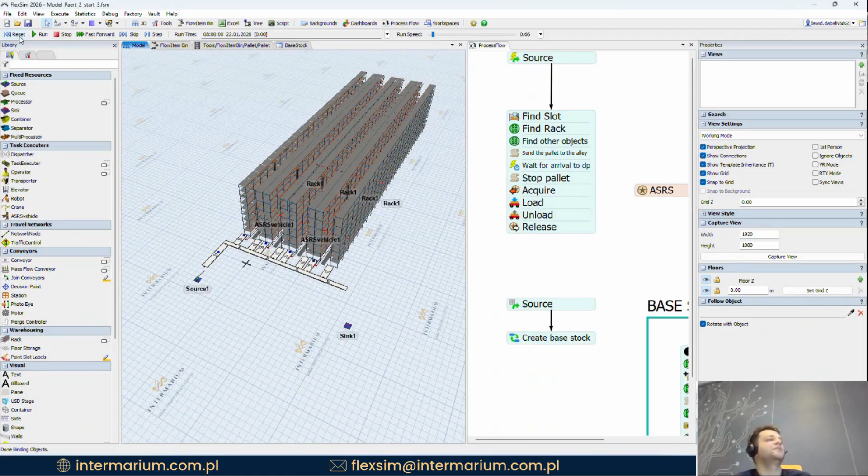In this webinar, we are working on an automatic warehouse. This is the second part, maybe three or four parts total, and we should be able to finish this warehouse. We're doing this thanks to your suggestions, more like a workshop. A lot of users requested this automatic warehouse, and this is also how we work with our clients. So if you have any case you want to do, maybe you want help with modeling on your cases, we can set up a call or make a workshop where we try to help you build something together with you, as I am building this right now with you.

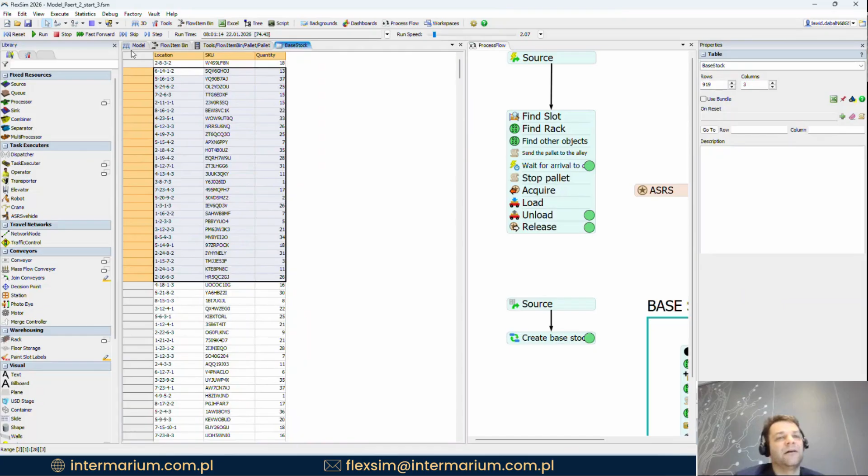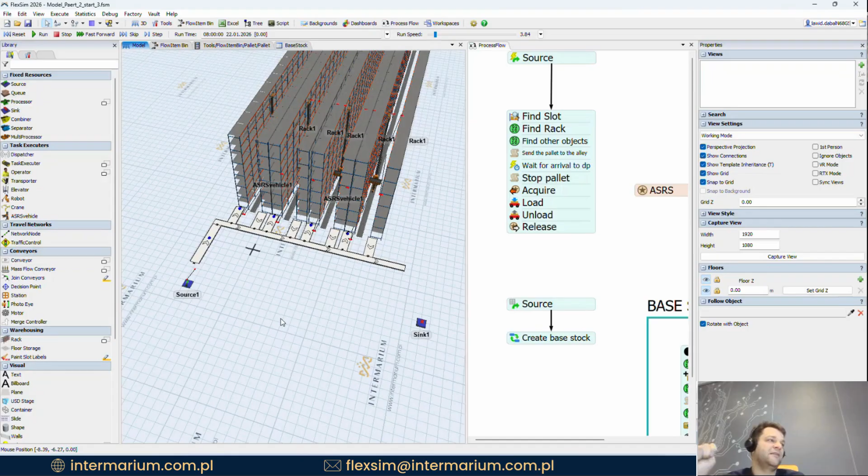Okay, so let's start. As I mentioned earlier, this is where we finished previously. We had the working ASRS, working rack structure, working conveyor base, and we have a base stock table, so we can generate the base stock in our warehouse according to this table. This is what we have. What we want to do today is bring in more data. We want to have inbound and outbound data in this, because right now we just have the source, and the source just generates the pallets. We want to have some table with inbound timestamp - let's say we want to try out some historical scenario or generated scenario with a given timestamp and a given product. We want to have it all. And also we want to create the outbound movement, because right now we are just putting the pallets into the racks, doing the put away logic. But we also want the logic that whenever I do the put away, maybe the ASRS, there is a need for some pallet, and the ASRS can pick it up and move it onto our conveyor system. So this is what we're going to do today.

So more data, more input. In the Excel file, I have the base stock - this is something we are already importing into our model. And I also want to have the inbound table. So what I have here is some pallet. On the pallet, there are some number of goods, 5 in this case. We're going to represent this as a label, and we have a timestamp, so I want this pallet, let's say, to appear in my system at this time. So this is the time I'm going to use here.

So at the 20-second and 26-second mark, I want my pallet to enter my system. I have this for inbound and I have this for outbound. I also want to take from my warehouse this SKU at this timestamp. So this is where the request is going to appear. At 107, I want to request this pallet from my warehouse. I don't know where it is - it's somewhere based on the base stock table. I want to request it.

So I have this in Excel. We already created some Excel import interfaces before. So what we need to do now is create global tables from our data.

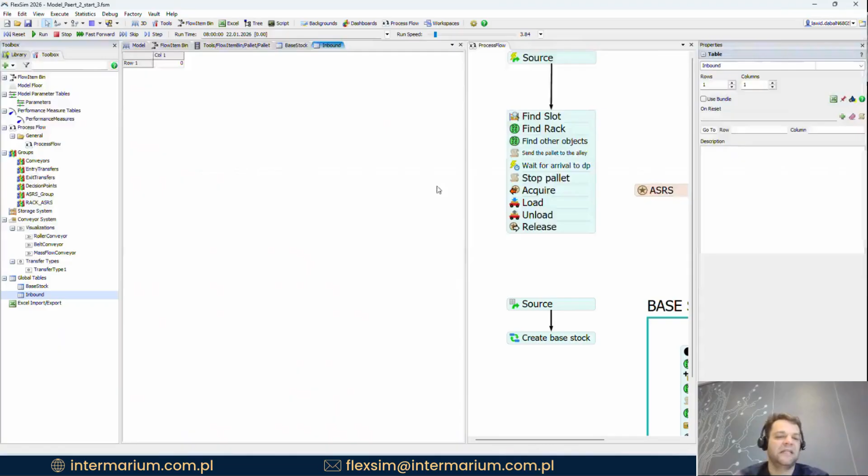So I will call it inbound. Let's start with inbound - so this is my table. I need to check how my Excel sheet is called. It's called inbound. I'm going to copy it, then go back to my model, the Excel interface.

I will add one more import line. I'm going to call it inbound, from the same workbook. Here you can choose new, and then the user can choose the next sheet - maybe it's a different Excel file, or blank. If I choose blank, then it's the same Excel file as I chose before. So if I know I have all that data in one Excel file, I can choose blank, and then we just import different sheets from it one by one.

So it's the inbound sheet, and I want to put this in the inbound table. I don't have headers, I have the columns, so everything's okay. I can now click import to this Excel, and now I have that data from the Excel file. So this is my inbound table. I have now base stock and inbound, and those are the same data I have in Excel.

Okay, so now we have data, so now we can start working with it. We have data - let's go back to the model.

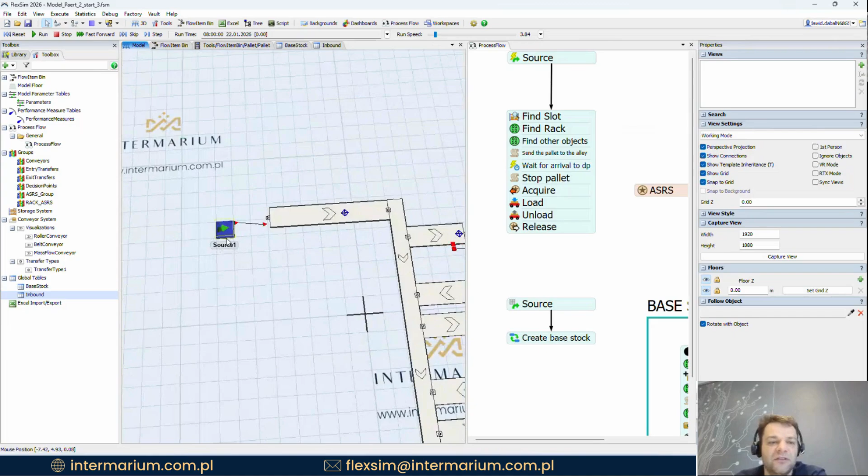So before I had the source, and source just generates pallets for me, but it's no longer the case, because I want to generate those inbound pallets from this table. So I need to write the logic to create it.

What I usually do is use a queue, and I'm generating everything on this queue, and then automatically it's getting added to the entry channel for the conveyor. It's a bit easier for me because then I can track the backlog. Maybe if I have some blockage, I can track how many products are on the queue, meaning there is no space for them in my system. So it's a little bit easier if I do it like this.

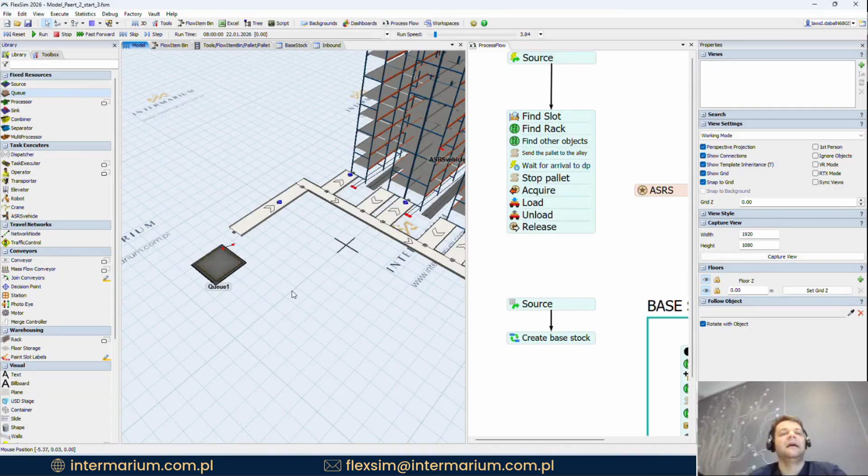And of course it's better if I want to handle the overflow in a way. So I have the Queue1, let's call it inbound flow - this is where I will start my inbound flow. I want to generate a pallet on this queue, and then using the port connection, it's going to be automatically moved on my conveyor system. So this is the object.

Now let's create the logic in the process flow. So what I want to do - I have this inbound table. Maybe I will just dock it for a moment here so I can see it. And I want the pallet to generate here with this SKU, with this quantity, and at this timestamp. Okay, so how can we do it?

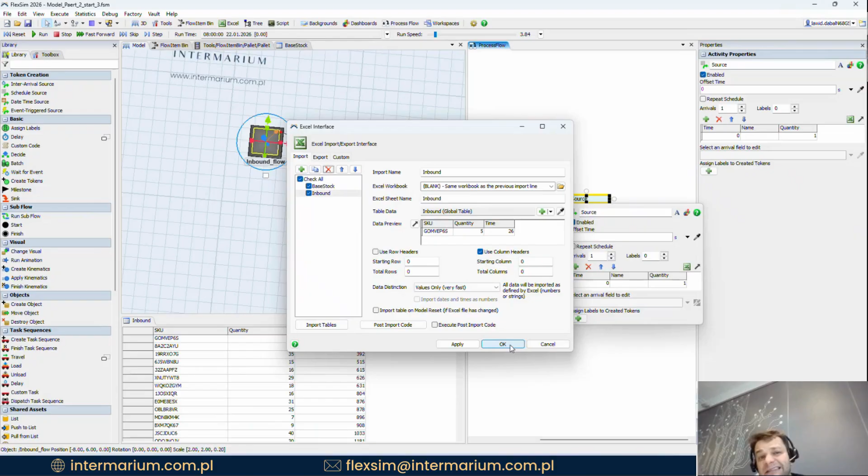There are multiple ways of doing it, to be honest. One way, for example, is you can use the source, and you can get this part of the Excel file to be stored using the Excel interface. So if you structure your table in Excel correctly, it can be transferred right here in the schedule source. It looks easy, but I'd say it's not very good in terms of performance - this can get really slow.

So what I usually do - there are also multiple ways of doing it - we can generate as many tokens as I have rows in my table, and then make a delay. And when the delay finishes, I will create the pallet. But then the issue also with performance is that, okay, in this case I have 1,000 rows.

But if I have, let's say, one month's worth of inbound, and each time I'm generating the inbound I need to create as many tokens as I have rows, and I have 10,000 rows or 100,000 rows, then the model will be very slow at the beginning because you need to reserve a lot of memory for all those tokens, because it's 100,000 tokens. So I think what I usually do is just generate one token - this is my one token.

I'm going to go through this table step by step, creating a delay that is the difference of these 2 values. So for example, the first is 26, it's easy, but then the next one is going to be 32 seconds. And because I have 1 token, I will just move in a circle, move in the loop.

I don't need to create as many tokens. Performance-wise overall it's the same because I will generate 100,000 tokens, but because this performance is distributed along time, the model will go smoother in the beginning. Usually, especially when you're building a model, you're going to reset and run it a lot, and you don't want to generate thousands of tokens each time because it makes the model slow. You need to wait a few seconds, and if you wait a few seconds every reset run, it will get on your nerves every time.

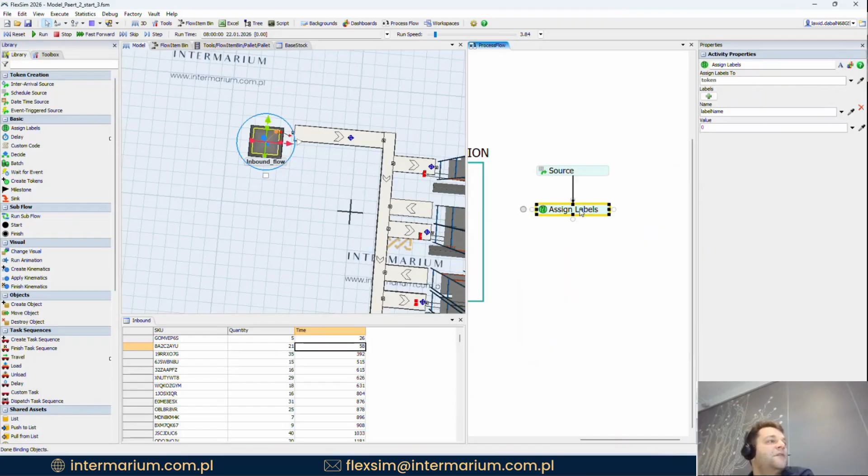So let's do it like this. I will generate 1 token, and in this 1 token, what I need to do is create what I want to create. Let's do it now. I will have the assign labels here, and in the source I will create 1 label. Let's call it inbound row, starting with 1. So this is my first row.

Maybe start like this: I have a delay. On the first row, I need to have a delay because I need to wait this time, because the first row is different since I don't know the difference between those 2 values. So what I want to use here is this value from the first row: token dot inbound row inside. Now when I reset run, we have 26 seconds as I have in the table.

And then after this time, I want to create the pallet. So I will create an object, let's call it create pallet. Now this is going to be our palette, so I'll go to flow items and choose pallet, which we already created before in the flow item bin. There's going to be 1 palette. Let's call it palette. It should have 2 labels, SKU and quantity.

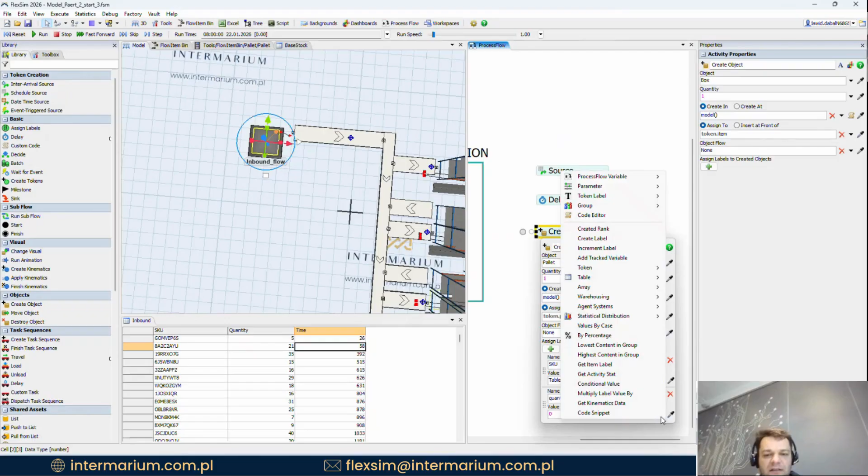So it will have the SKU. I will sample this and change it to token dot inbound row. You can also do it if I have the quantity here, by choosing this option, go table, global table lookup, and then fill this out manually, like this is the second column. It works the same, but the main difference is that with this, if I have more labels, I can't copy it, because it just copies the header, not the logic itself.

That's why I prefer choosing it like this and just changing the row value, because then if I have more, I can just copy it and change the column, and it's much faster, especially when you have a lot of parameters that need to be moved from the table to the model. It works virtually the same—I have these 2 parameters. So at this time, 26 seconds, I want to create the palette, and the palette has all this parameter, and I want to create it in an inbound flow.

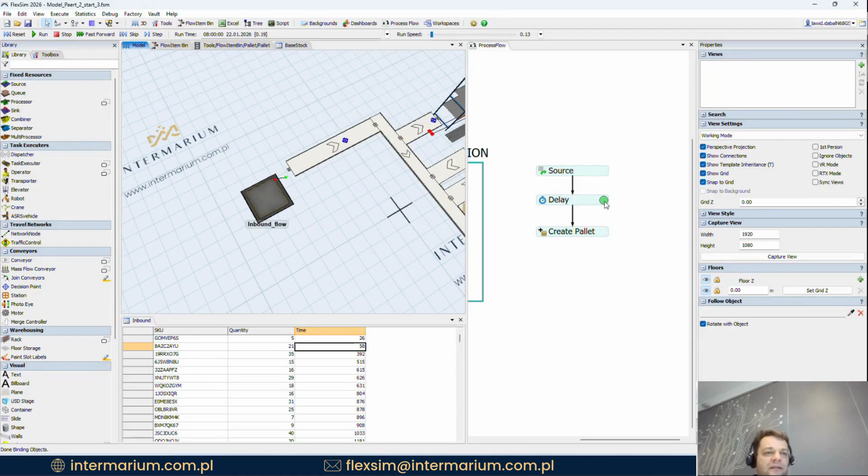Okay, so if I have it, this is, let's say, the first loop. Now I need to loop it. So what I need to do here is create the assign labels, because I need to increment the inbound row. I need to increment it, because it was the first row, then second, third, fourth, and so on. So I want to increment the inbound row, increment label by 1. If I increment, then I need to create a delay.

So it's going to be a delay, let's say, between pallets.

In this case, this delay is the difference between 58 and 26. So I can copy it, and it's minus the previous row, so -1. Isn't it a trick? It's this row minus the previous one. So then I have the correct calculation of delay between those two arrivals.

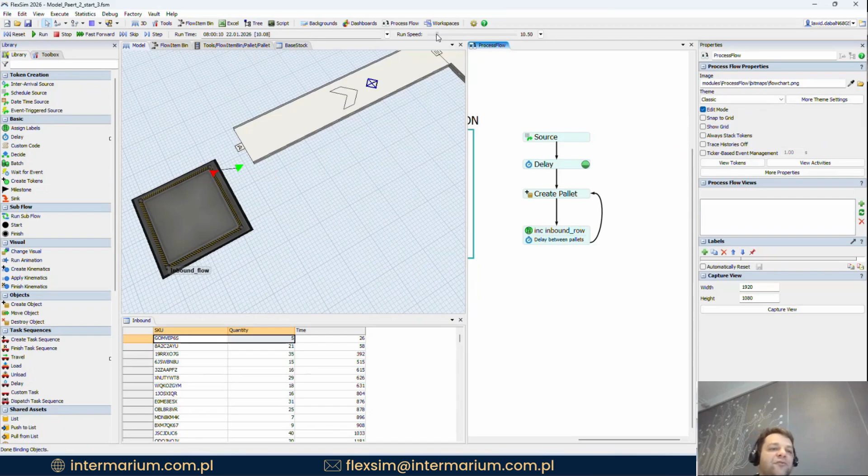So in this case, I can use historical data, for example from my WMS system, or I can create my own scenarios in Excel using timestamps, and generate the flow based on historical data. It's pretty easy, as you can see, to do it. You just need to have good data.

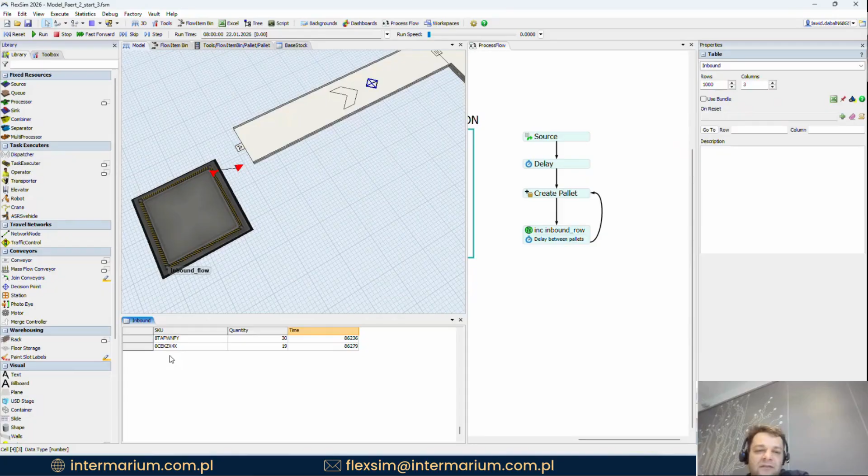What you need to remember is that at some point the simulation table will finish, because I only have 24 hours of data in this case. So if I have 1,000 rows, and I get the inbound row value as 1,001, it will return an error in FlexSim because I don't have data in that row, since I don't have that many rows.

So usually you need to be sure before you start this calculation that you check if the inbound row is still less than the number of rows in the table. You still need to check this. So we will write a conditional decide: if I have the global table, I can write there the number of rows, and check that the number of rows is still greater than or equal to the token's inbound row.

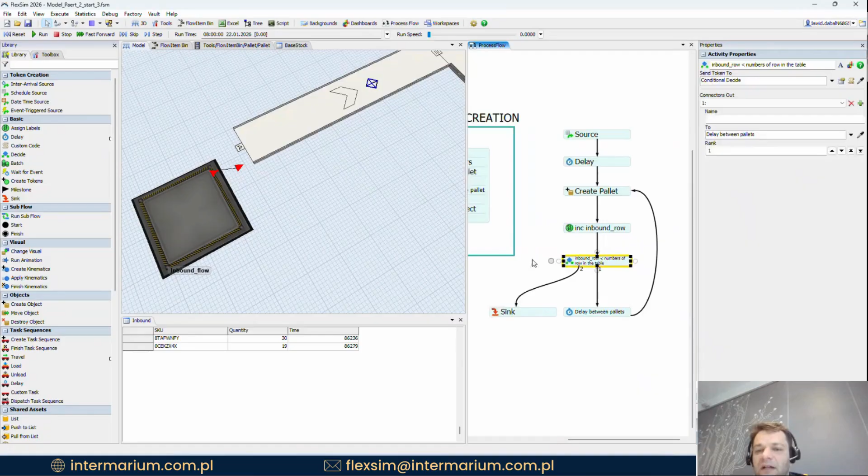If this is true—let's say my inbound row is 950 and I have 1,000 rows—still good. But if it's 1,001, I don't have that much data, so I need to break it. I want to destroy the token, stop this logic, and not generate anything more. It's good to do it like this because then you've finished the data.

So for example, you can create some stop into the model. You can stop the model. Let's say you generated everything, and I want to stop the model whenever I have the last record of data, or after some time from the last record. So you can have a dynamic stop of your model because you calculate everything, and you never know exactly when it's finished since you can have a dynamic set of data.

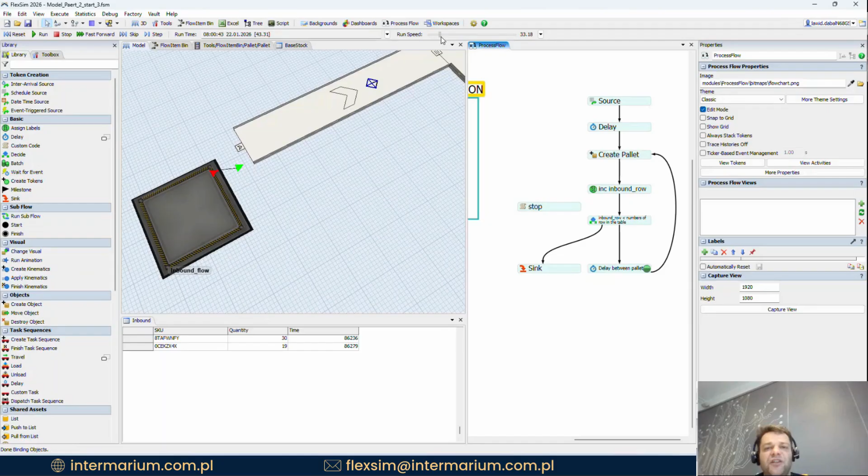So in this case, you have this flag control point. You generate everything, and then I want to stop the model and maybe run some calculation. This is something you can do here, because with this decide you've generated everything you needed in the model. And now it will loop back in the logic and generate different pallets. So this is the inbound, and inbound is good.

For future reference, if you want to stop the model at a given time, you can go to the script. And in the script, if you just write stop with brackets and a semicolon at the end, this is your stop. So if I put it there and reset and run, the model will automatically stop at this point of the logic. If I run it again, it's like pausing, then the model will continue.

So you can have some stoppage to see when something happens. It can be done via stop, or it can also be done with a breakpoint. Then the model will automatically stop at this point, and you can debug your process flow, see what is happening, maybe put a little more thought into the logic, and see if this is working correctly.

Okay, we have the inbound, it's working fine. I will put a frame over it, a container, so this is my inbound. So I generate the pallet, the pallet enters the conveyor and moves along it. Then I have this logic here so I can understand what is happening and where I'm going.

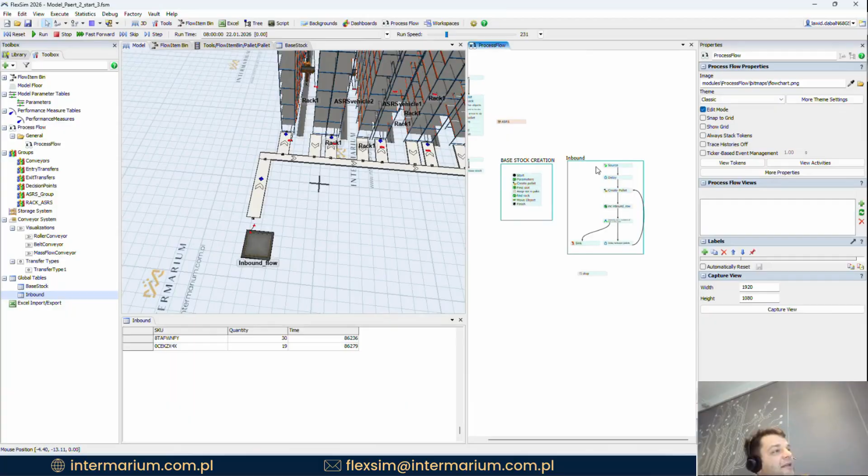Okay, this is good, we have the inbound. Now let's add the outbound. So I have the inbound, this is okay, now let's add the logic for outbound. So go back to Excel. I have a typo here, let me fix it: Outbound logic. Outbound, I have the data, SKU, when I need it, because I need to remove a pallet from my warehouse in this case.

So I will also go to the global table and create an outbound table, add this to the Excel. So again I want to create one more export file called outbound. The outbound table data is outbound, and I want to import it. It asks me which file.

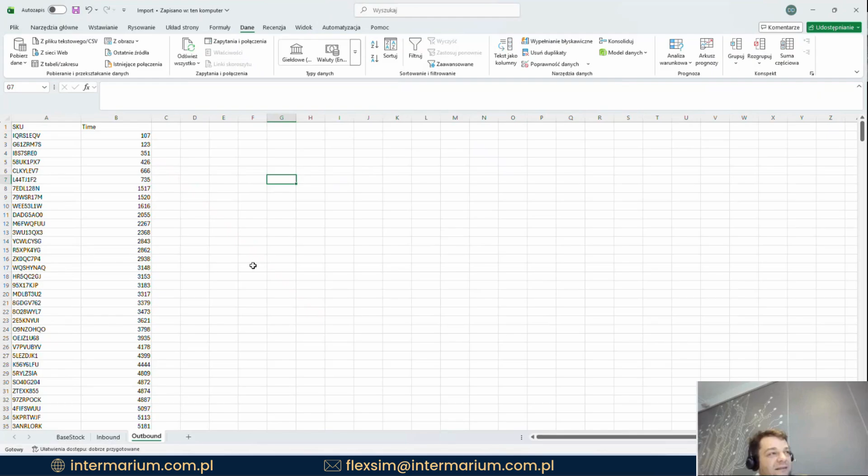So yeah, I have the error. Why? I changed the sheet name, but FlexSim doesn't show it. Why? Because I didn't save the Excel file. If you make changes in the Excel file, FlexSim doesn't see it until you save the Excel.

Yes, it's important to save it. And then if I import it, it should be all right, because I've changed that sheet name. Took me a few seconds. I have now inbound and outbound table. So we're good, we have all the data we need: inbound, outbound, base stock.

Now we can start playing around. I need to tell FlexSim that I need to get this pallet at a specific time. So we can more or less use what we already have. We have the inbound. I will copy it here.

In this case, I'm going to start making the outbound logic. So I have inbound, let's call it outbound, because the general framework will be the same. I have one token looping through this table and generating the request for a given table. So the source is the same. Maybe I will change it to outbound row. We can understand better what we are doing from the outbound row.

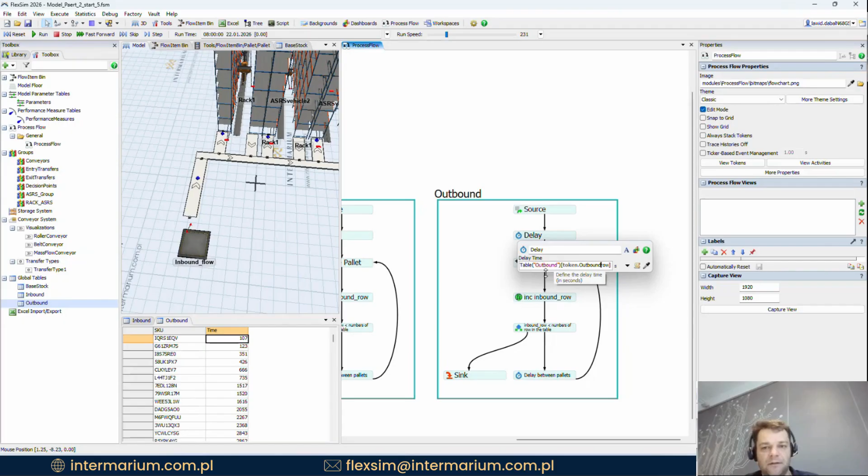In this case, I have a first delay, and this first delay is in the outbound table, from outbound row. Yeah, this is my first delay. The difference is it's in the second column because I don't have the quantity, so this table is structured a little bit differently. It's going to be on the second column.

And here is where the change is going to start. In this case, I need to look for the pallet in my warehouse. So I will create some assign labels because I need to know which SKU I'm looking for. So there is some SKU, and this SKU, let's call it SKU,

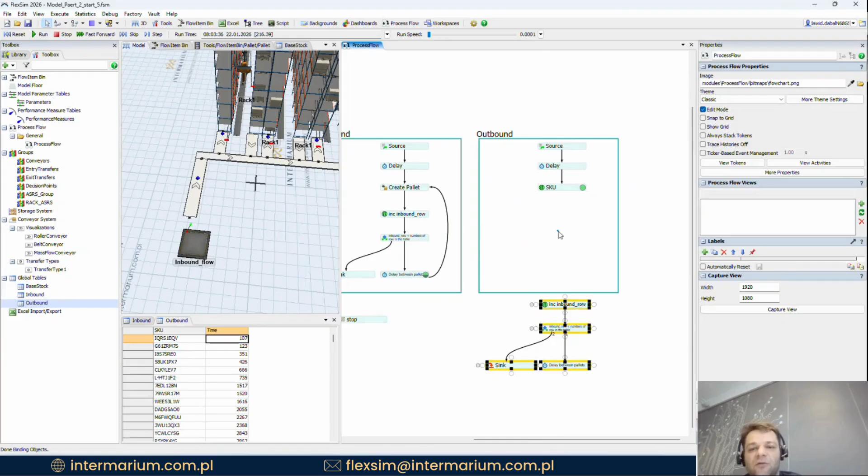is in the table. Again, I can do like this: in outbound, the row, and the row is outbound row, comma 1. So if I reset and run, I know that right now I need to get the pallet IQRS. This is the pallet I need, so it's IQRS. So what I need to do is find this pallet in my warehouse.

In this case, we're going to use the find item logic. And what is the query here?

I don't want to have any item, I want a specific SKU, and I want to match the item label. With find item, you can look for a product based on the item label, so what is on the pallet, or based on the slot label, so in a given area of the warehouse. You need to get items, you need a specific item, or anything from the given area, or any combination of both in this case.

So in this case, I'm going to match it with the item label. And the item label is SKU, and I want to compare with the SKU. You have $1, which is the parameter for this query. $1 is, in this case, token, so $1 SKU is the same as token.sku.

Because you have the parameter, you cannot mix FlexSim language and SQL. In this case, we need to pass the parameter somehow to the SQL query. And the $1, you can pass it from the token perspective. You can have more of this parameter, it depends how complicated your query is. So if I reset and run, you can see our pallet is having the SKU.

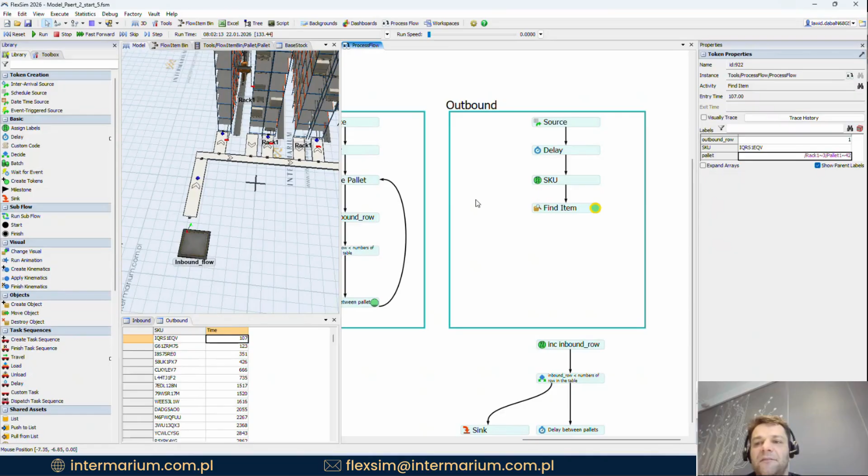So when I'm looking for a specific SKU, and here assigned to, I want this to be token.pallet. So if you find the item with the matching SKU, I want to store it in the token.pallet label. Reset and run, let's see if this works. Yeah, I have the pallet here, so it was found. If you want to see it, you can click on it, you can mark it. This is the pallet, here it is in the warehouse.

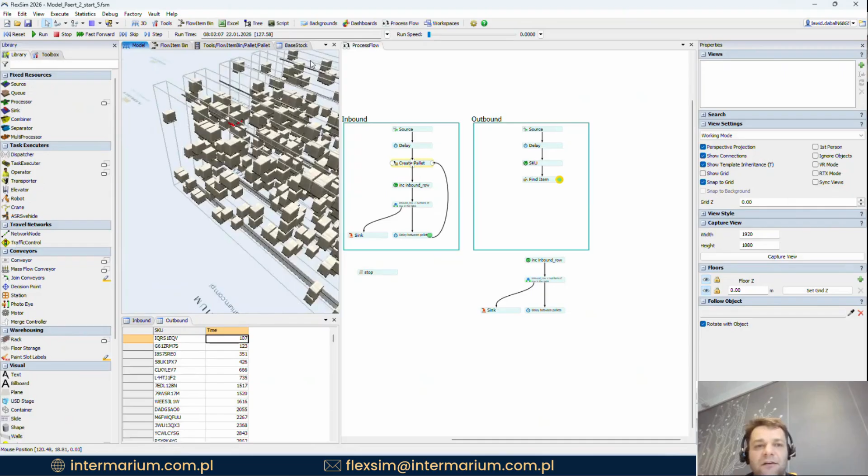Sometimes I'm building the model. Of course it's good to have the racks, but sometimes I have the group. I have group for racks, so you can click on any rack and change the visualization to wireframe, so you can see what is inside the racks. If I run it and you have this situation, you click on the binoculars to know which pallet it is. You can also click here, so it will have the red outline.

So this is the pallet I'm looking for in this case. Okay, so we have the pallet. We now know what we want. We want to have this pallet. But how can we force the ASRS to take this pallet?

In this case, we have the inbound, the outbound. Now we need to change the logic, how we are going to control the ASRS. Because right now the logic is here: you have the ASRS, and it just takes the pallet, and this is it, we acquire it. But usually you want this to be in double cycle, mixed cycle.

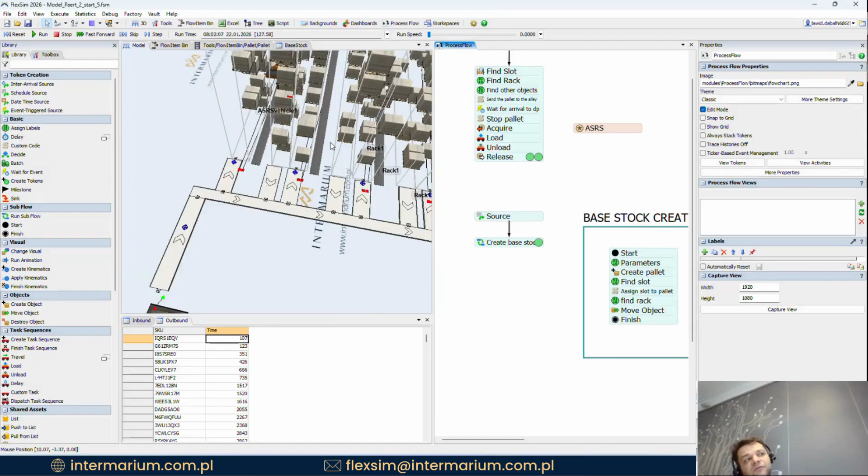So if the ASRS is taking something and putting it into the rack, I should check maybe there is something to be taken out of the rack, because there is a request here for this specific item. So we need to handle, let's say, the priority of logic, how the ASRS is working.

We're going to do here the basic framework, but basically it's pretty universal, and you can put more and more parameters there if you want to create more sophisticated logic about how your ASRS are working.

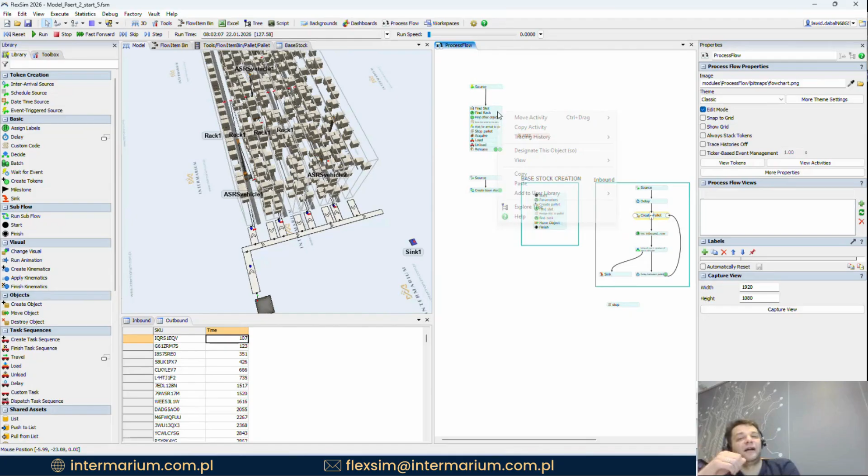Okay, so in this case, what do we need to do? We need to create the logic from the perspective of the ASRS. Right now, let's say we are pushing the pallets onto ASRS, and ASRS are taking those. But we will write the logic from the perspective of ASRS. So let's imagine that I am the ASRS.

So I am the ASRS, and I'm waiting for a task. If I have an inbound task, I will go and take it. If I finish the inbound task, I will check maybe I have an outbound task I can do. If I can do it, I will do it. So I will take the pallet from the rack, bring it here, and then I will check, okay, I've just taken the pallet out of the rack, maybe there is something I can take as an inbound task, and so on and so on.

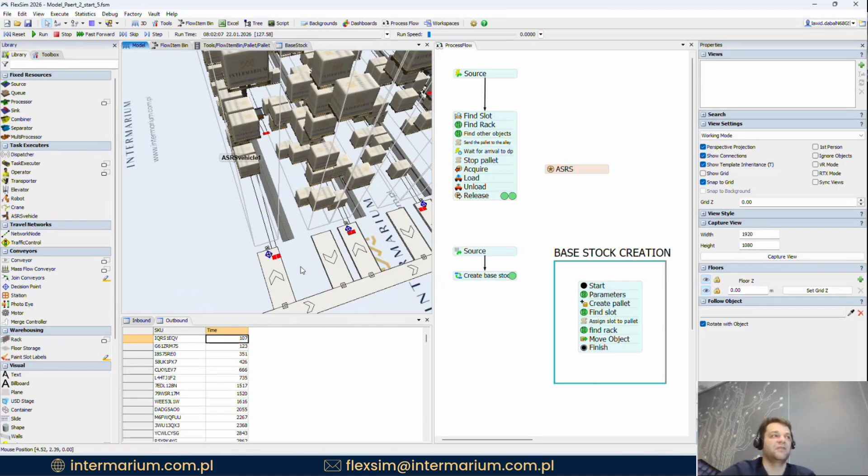So we need to handle this logic like this, and we will do it with a list. So we create the list of tasks that my ASRS is having, and then based on this list, I will choose which task should I do next.

Because I can do it right before, or I can, for example, tell the ASRS, okay, where you are right now, and find me the closest pallet that needs to be taken out of the warehouse from where you just loaded a different pallet in this rack. And so we can try out different optimizations in terms of how the ASRS should work.

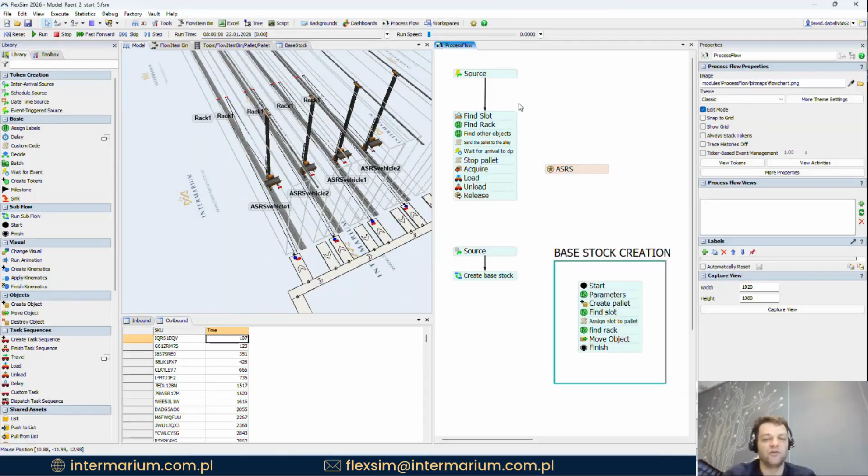Okay, so we need to do the list. What is a list? We can treat a list as a dynamic repository of things in FlexSim. So the list lets you handle whenever you need to choose something based on any parameter. In this situation, I need to choose, and in this case, ASRS is choosing what to do next, and it can have multiple requests. Maybe we have a situation, what is more important for me, outbound or inbound? Should I start with outbound or should I start with inbound? All those questions can be answered using the list.

So what we need to do at the start is create the list. In this case, I will create a global list of items, and I will call it ASRS tasks. I will remove all parameters for now. I will create just the list, and I will show you how to push things on the list, and then we're going to mark it. So on this task, we need to know if this is the inbound or outbound task.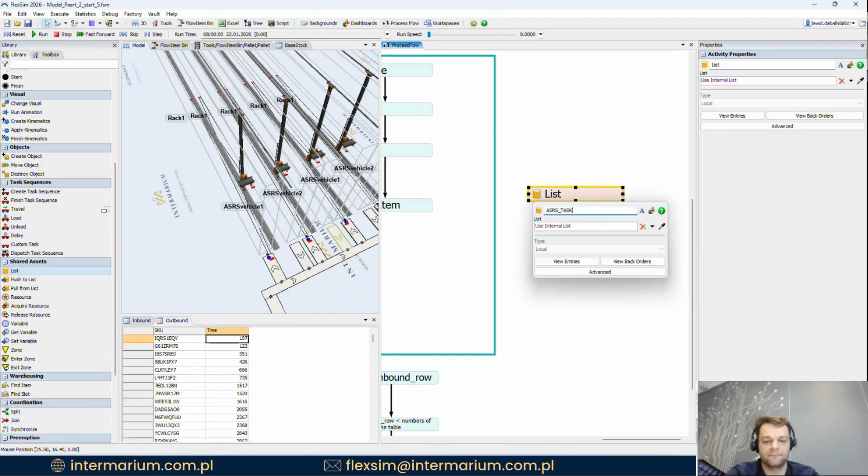Okay, so I am ASRS, I have the list. So now we need to write the logic to put the task on the list. In this case, what do we need to have? Let's start with outbound. So I will create here a 'by list' from the process flow. This is the list, I will call it ASRS tasks. Make the connection to my list.

And okay, let's go to outbound. You have the item, yes, I have the item. So now I need to push this item to the list. So push, create, in this case, ASRS task, and push value is going to be my pallet.

So if I reset and run, I'm going to drop here. And now on my list of tasks, there is one pallet waiting to be taken out of the warehouse.

Now, what I need to know about this pallet in order to handle the logic from the ASRS perspective: first, I need to know what kind of task it is. So I find the pallet, I will mark it, and call it task. I will create it, and this task type is outbound with the string. It can be inbound, outbound, or reshuffling. What kind of task is it? I'm going to have to name it somehow. So it's an outbound task.

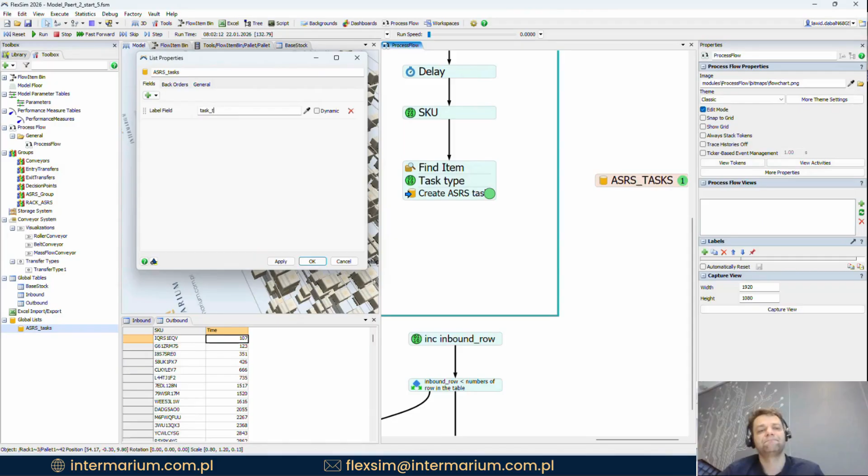Now, if I reset and run, nothing changes. But I know now this pallet has the task type outbound. I know what kind of task this is. And from the list perspective, I don't know about it. So we need to go to the list. You can go to the advanced here, or you can go to the global list. We create a label field called task type, but make it dynamic, it could change some way. And now if I reset and run it, because I've added this field, now on my list, I know that I have one task of outbound type here.

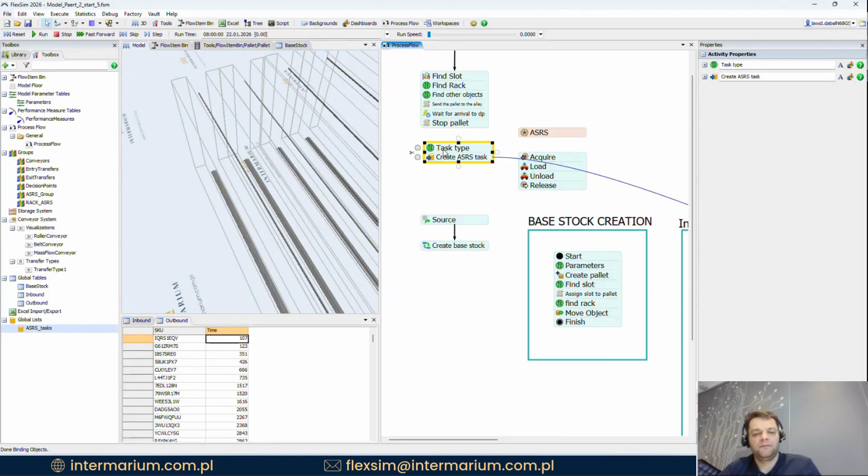Okay, so right now, this is what I know: one pallet outbound. Now let's do the same for inbound. So I am here, I'm stopping the pallet. I won't call the ASRS yet. For a moment, I will just move this here and copy this logic. In this case, we have the same name pallet, it's good to have some kind of standard to always name pallet, and this way we can more easily copy between different logic. So this is going to be inbound of different task type.

And I also want to push it on my list. So now when I reset and run, you will see in a moment, because I don't have the logic of inbound yet, but after some time, on my list, there are multiple different tasks of inbound or outbound. This is what I have. Well, I need to connect it here. And this logic, now you can see we have different tasks. So right now I have the list. I know what needs to be put into the rack, taken out of the rack.

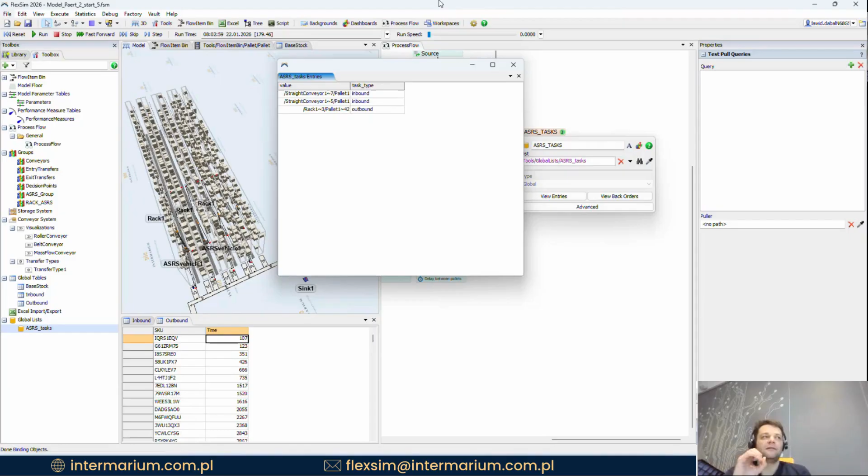This is good. Now, what else do I need to know to handle the logic? I need to know from the ASRS perspective. Let's still imagine you are the ASRS. So I am the ASRS. I know what needs to be taken into the rack, out of the rack. This is good, but I need to know if this is my task. Because if I am this ASRS, I need to be able to identify if this pallet is in my area of work, because I only take the pallet from these two racks. I cannot take the pallet from all the right side. It's not my area. So I need to somehow mark it that these racks belong to me, to my area. Because if I'm looking for work, I'm looking for inbound or outbound task, but only from my area of work.

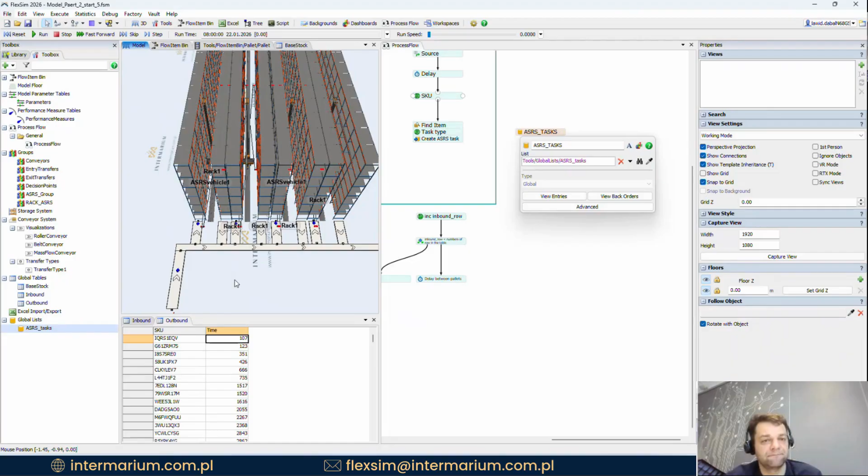So what I will do is I will create on my racks, I will use groups to do it. On my rack, I will create a number label, let's call it ASRS number. And click on one of the racks, clicking here, and then I can copy these labels on all of my racks.

And now I need to decide which rack belongs to which ASRS. So for example, these two racks are ASRS number 1. The other one is 2, so this is the second ASRS. Then is number 3. And then it's number 4. Yeah, this is how I have it.

You can click here also, click on the compare properties, and then you have all different labels for all my racks. You can filter it, you can play around with it. So you have the list of all the racks. And if you name your rack right, you can easily spot the difference or fill in the data almost automatically.

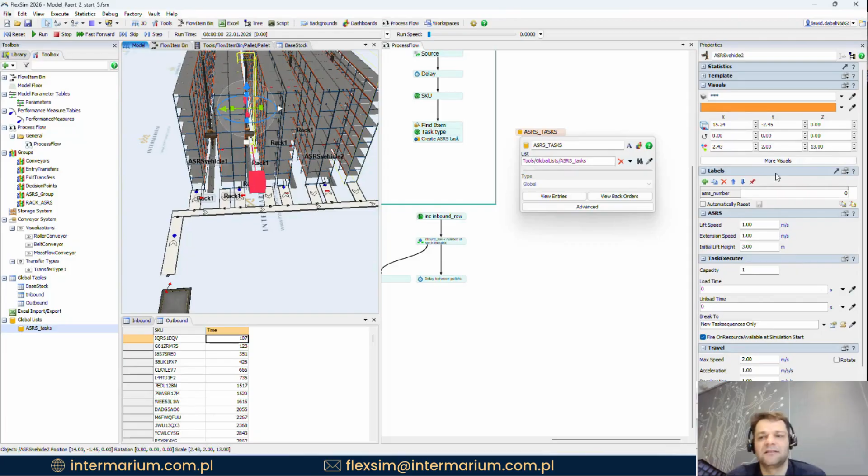Now you see how good it is to have groups. I don't need to control-click some hidden objects because everything is in the group. I will again create a label, ASRS number, name it the same, and copy it to every ASRS. So this is 1, this is 2, this is 3, and this is 4. With this, I have this information.

Now I need to put this information on the list for my task. So let's go back. I have a task type, I know the pallet, I know the task type, there is outbound. But now I need to also define what is the ASRS number to handle this task. In this case, I know where the pallet is. The pallet's on the rack. So if I go token.pallet.up, I'm at the rack perspective. This is my rack, and I know that on the rack I have the ASRS number label.

So with this, I know where I'm going. I know that this pallet is on the rack, and the rack has this label. I'm going to use it, put it on the pallet, and then in the list I can also have this label field called ASRS underscore number. So this is my task.

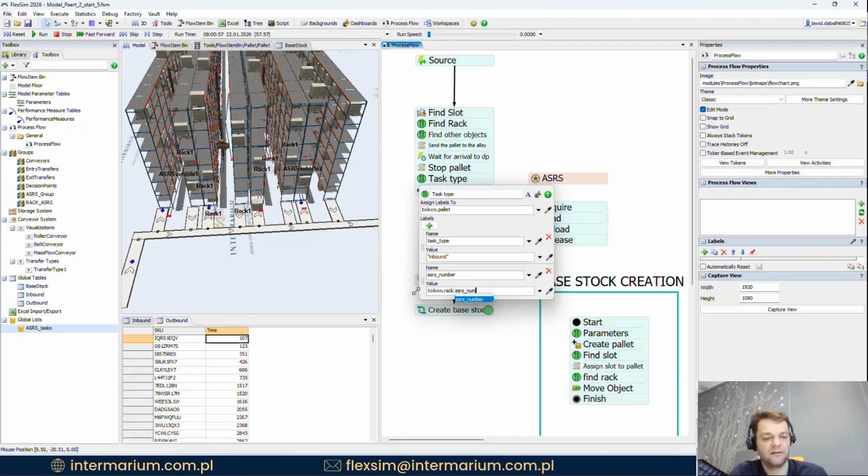Now I need to do the same here in my inbound logic. In this case, I know the rack because I already have the label for it, because when we were looking for the slot before, we also wrote this logic here. So from the slot perspective, what is my rack? If I have my rack, in this case, I can also create ASRS number. It's going to be a little bit easier for me: token.rack and this ASRS number. It's easier to access the rack than to access the slot, because the rack is modular and can be treated as an object.

So now if I make those changes, if I have this list, then on the view entries I know what kind of tasks are waiting for me in this case, and which is the ASRS number that needs to handle this task.

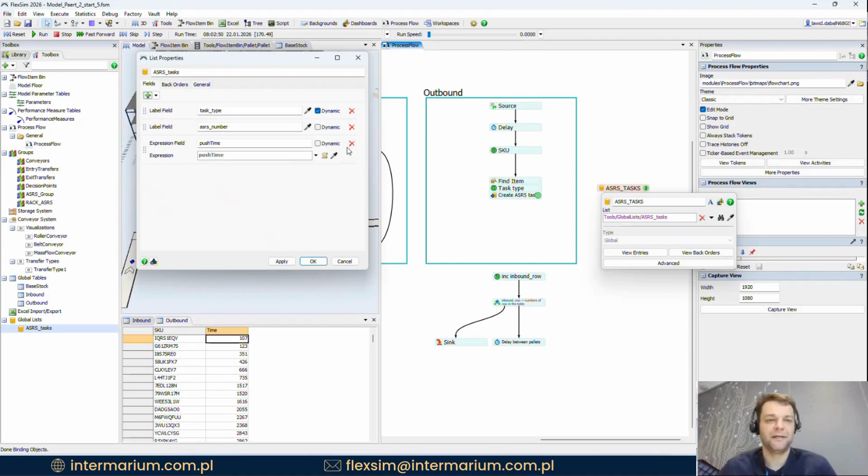With the list, we can put much more information if we want to create more custom logic. For example, I can very easily add advanced fields, like the push time, which is when the request was made. So you can filter all those requests, or if a request is waiting for more than a certain amount of time, handle it with priority, whatever. The list is very general - it gives a lot of different possibilities. Okay, we have inbound, outbound, we have the list.

So now we need to write the logic from the ASRS perspective to handle this task. Okay, I am ASRS, so let's apply this logic. In this case, I will use the schedule source. We have the ASRS, we have the group in this case, and I want to acquire it. This is going to be the same - I will acquire it and name it ASRS resource.

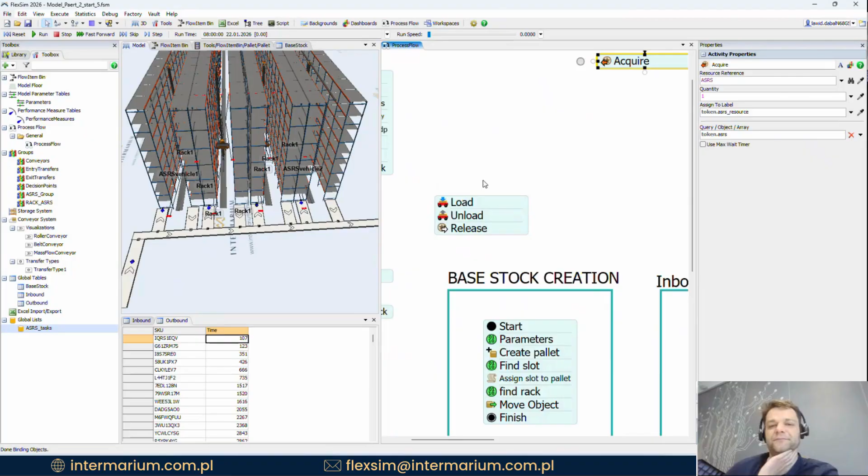Yeah, it's good, I don't need to have it, so we can just leave it like this, ASRS. Let's change the ASRS the same way. So I have the ASRS from this, and I want to create a token for every member of this group. Why? If I copy it, I want this logic to automatically scale. So I want this to work for 4 ASRS, but I also want it to work if I have 8 or 10 or 50 - doesn't matter. I want this to be universal.

In resource fields, I already have the group, and if I copy it, I will also copy the object. They will still belong to this group because this gets copied along with the copy. And here, I also want to create as many tokens as I have members of the group. You can sample it here, but if you go to script, you can sample everything. So I can go to the ASRS group here, paste it, and now we need to write it as a group, because FlexSim needs to understand that I want to have it as a group.

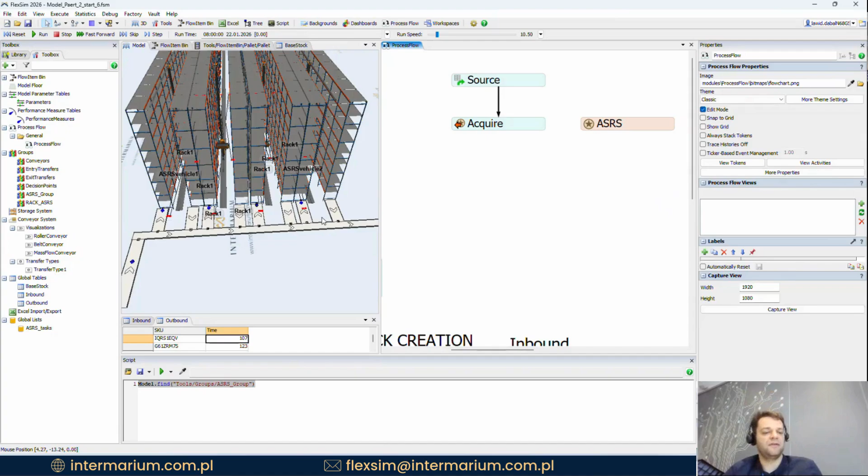And then you have the length, but it will create as many tokens as I have members in this group. So it will work if I have 5 ASRS, and it will work if I have more ASRS. Now I have 4, and let's say in the future I copy this rack because I want to have more - I copy and paste it. If I reset and run it, now I have 5 tokens. Why? Because I've copied it, it's in the group, so the logic automatically scales.

It's also a very neat trick. If you do it right, if you build one ASRS well, then you can just copy it and the logic will still work. So from the perspective of the number of resources, you will have the same amount of work in your process flow whether you have 1 or 50 ASRS.

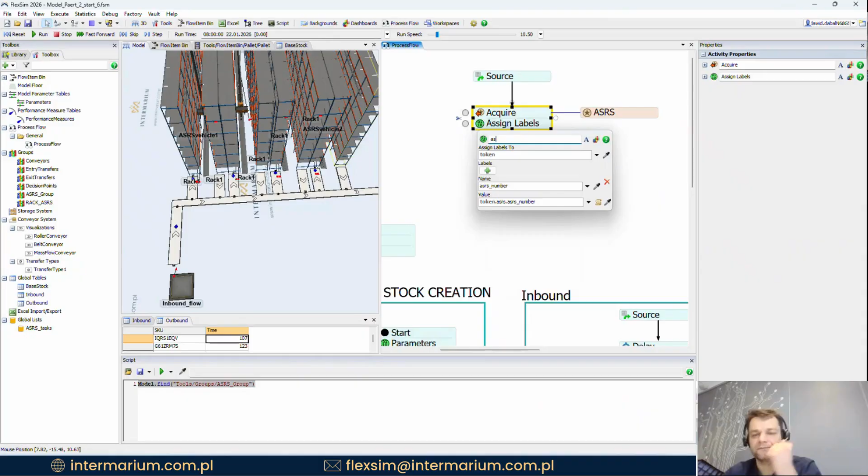Okay, so I've acquired an ASRS. Let's say I have it. I have the ASRS. I want to have the label there on the tokens, I want to have the ASRS number. And I know we have it on the ASRS as ASRS number. Maybe let's call it ASRS number. So now when I reset and run, I know I have 4 tokens. Each token has ASRS with the corresponding ASRS number. You have it, it works.

So now what is the logic of ASRS? Again, I am the ASRS. So in this case, maybe let's build it a little bit on the side, more space. I am the ASRS and I'm looking for work. So in this case, I'm going to use the pull from list, to check if there is a task for me in the ASRS task list. So it's going to be look for work. I want to look for work.

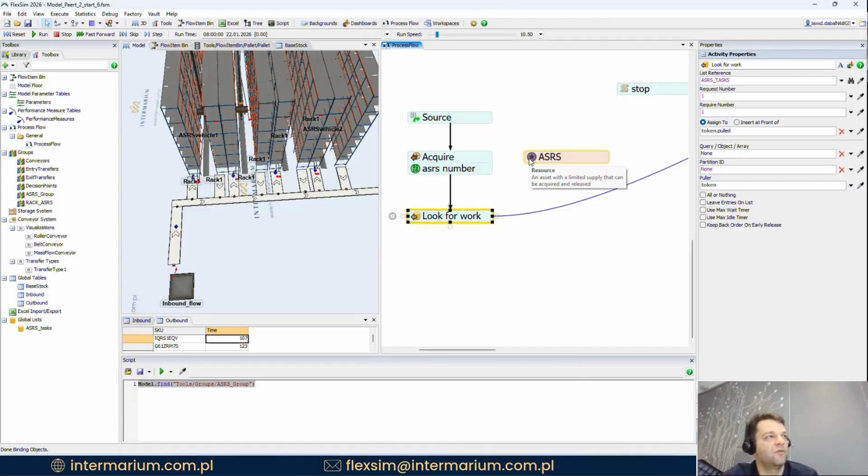And now is the question, what is the logic or algorithm of me looking for this work? This could be a whole simulation, that's how this works, especially if you are talking of AMRs, AGVs, or any fleet handling. In this case, I will look for work.

So what is the query I will use based on this list if I'm going to be looking for work? I'm looking for a pallet. This is given, I want to move the pallet. And what is the query? So first, I only want to look for work that is, let's say, in my area. So in this case, I want this ASRS to be the same.

With list, you don't have the dollar, you have the puller, and in this case, puller means token. So if I put puller there, it's the same as token ASRS number. So this will look for me for a task with the same ASRS number. So 1, 1, and so on.

And for example, let's say my priority is inbound task. So I also only want to look for a task type that is inbound. This is what I want. I only want to look for work that is my inbound task.

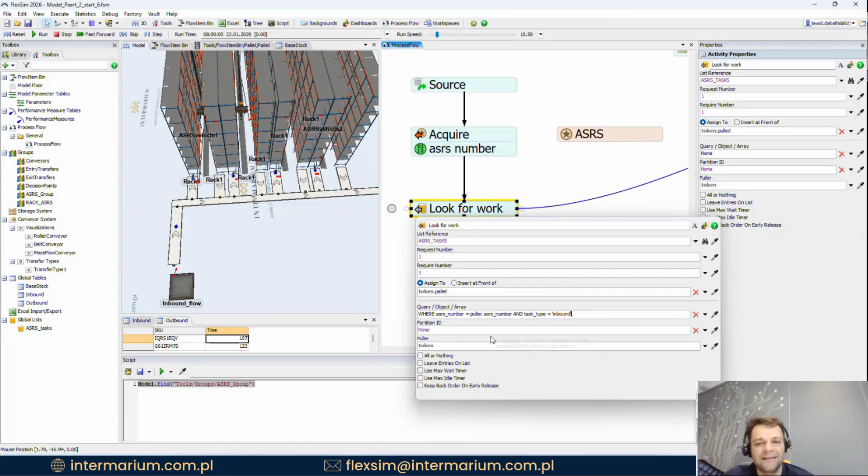If I have it, if I reset and run it, those tokens are waiting here because the list automatically handles waiting for a task. So let's say I will just put a delay there so you can see it.

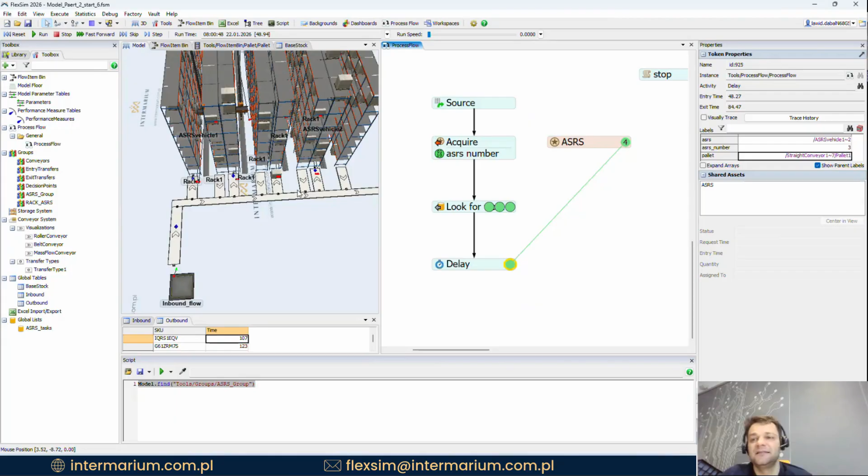So if I reset and run, at this 26-second mark, you have this pallet. You can see it moved there and the token jumped because now ASRS number 3 has found some task, and this pallet is on the straight conveyor. You know, this is this conveyor, this is ASRS number 3, 1, 2, 3. It's okay, so it found me the work.

So now, if I have this work, if I know what I need to do with it, then I can handle the rest of the logic. So I need to do load and unload.

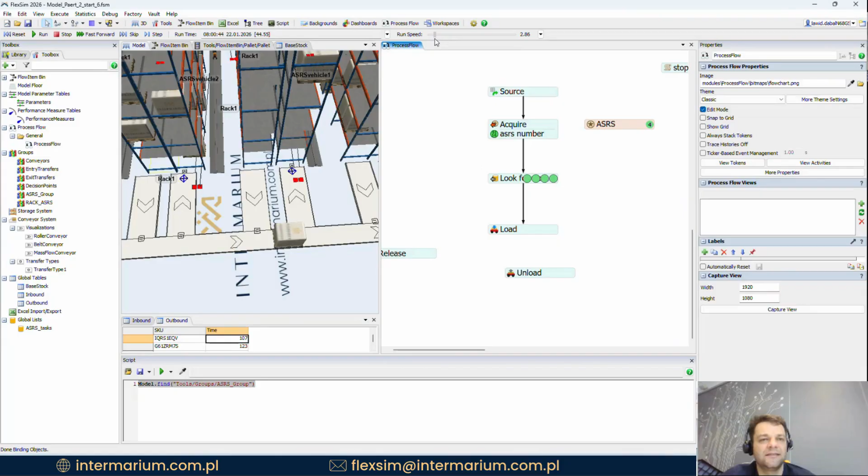Let's see if this is working. Load, so ASRS will take the pallet. It should work correctly, have the same names. At 26 seconds, the token jumped, and the ASRS is moving to pick this pallet. And it took the pallet, and this is it, because this is the right data of the logic.

Now, what could be an issue? Because now we need to unload it. So the ASRS takes the pallet and moves it onto the rack. But the information about the rack is somewhere in this logic, and I don't have it here. Yeah, because it's different logic, let's say I decentralize it. Because I have a different logic that is autonomous, that constantly looks for work, and I need to find a way to pass some information from this logic to this logic.

And if I want to pass this information, I need to store it somewhere. And it's best to store it in, let's say, the common things. And in these two logics, the common thing is the pallet. So if I put the information on the pallet, why not put the information about the rack? Because I have it there, it's on the token.

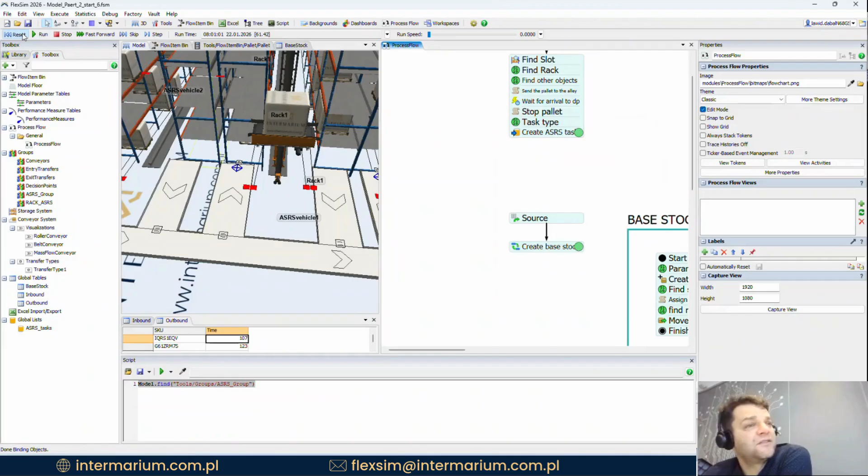So now if I pass the information on my palette, you will see in a moment with the palette right there, on the palette.

After stopping the palette, if I click here, I see, okay, now I know on which rack I should go. So now I can use the information in my logic here, in unload, okay, let's check on the palette where it goes.

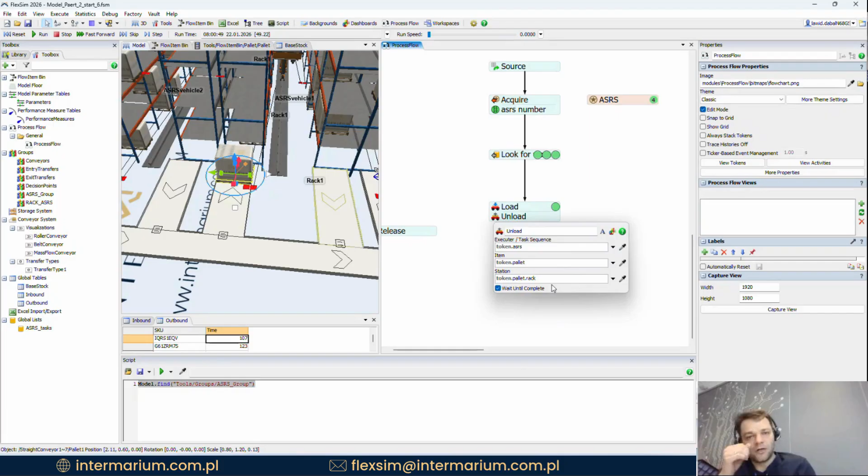This information is stored on the palette. It's always a good idea, if we're talking about automatic warehousing, to store all that information on the object, on the palette, on the container, or the quality, whatever. Because this is, let's say, the common part of every logic if you want to handle this somehow. So with this reset run, I should be able to move this palette from the conveyor to the corresponding racks.

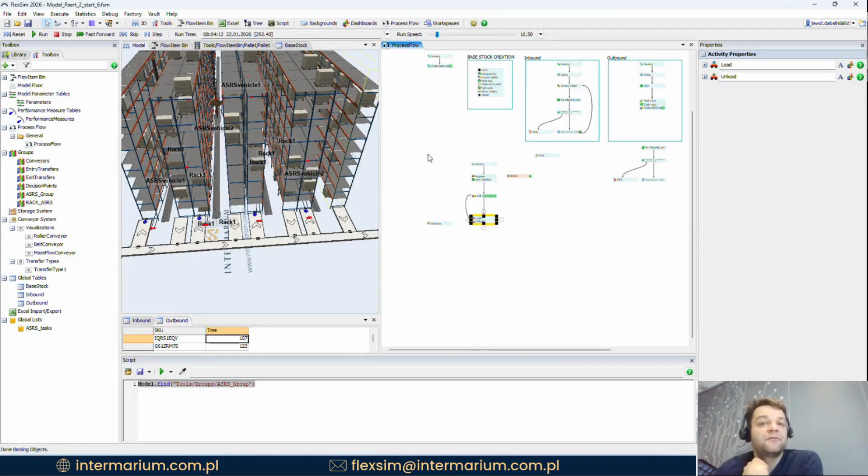Is there? You can see the seconds also working and so on. And of course, what we need to do is we need to loop it. Yeah, this is what I will do. We need to loop it. So I'm still looking for work. With this, it shouldn't be like this. Just to show you, we have, let's say, the same end result as here before. But now, let's say we have the different logic just for ASRS.

In this case, we look for work. If you don't put anything else, the default logic, if I have multiple inbound tasks, for example, would be FIFO. So whichever task was first put on the list is taken with priority. So you have straight FIFO. You can then order it by different parameters if you want to customize the logic for ASRS.

So I'm looking for work. I unit load, unload. Now, what I should do is, again, look for work. I will look for work, and this is inbound. And it's going to look for work, and this is going to be outbound.

And because if I am somewhere inside the alley, maybe there's a task for me to look of the outbound type. Good, outbound. Need to be careful here. FlexSim doesn't like a typo. So I'm looking for the outbound task.

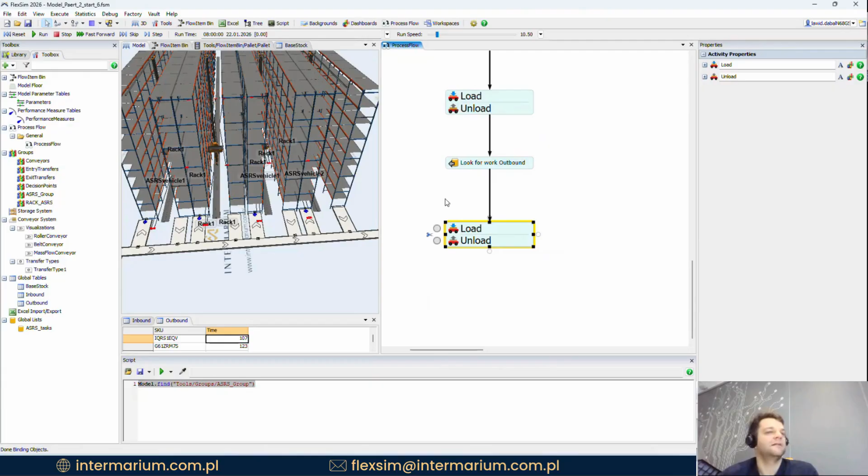And now, if there is some outbound task that I can look for here, what do I need to do? Then the ASRS needs to take the palette, and this is okay. It's the same, because here we assign to palette. So if you're able to find something that fits this criteria, then assign it to the token to the palette. It will be automatically changed, so we can have the same label. This value will be overridden.

So I have the load, but now I need to unload it. So it's ASRS palette, it's okay. But then we have the ASRS palette, and we need to define the station, so we need to define where I should unload it. And in this case, because we are doing this on the conveyor system, we need to have the entry transfer on the conveyor.

You cannot put something on the conveyor without entry transfer. You can, but it won't work. So it needs to be an entry transfer. So in order for this to work, we need to add entry transfer on every conveyor.

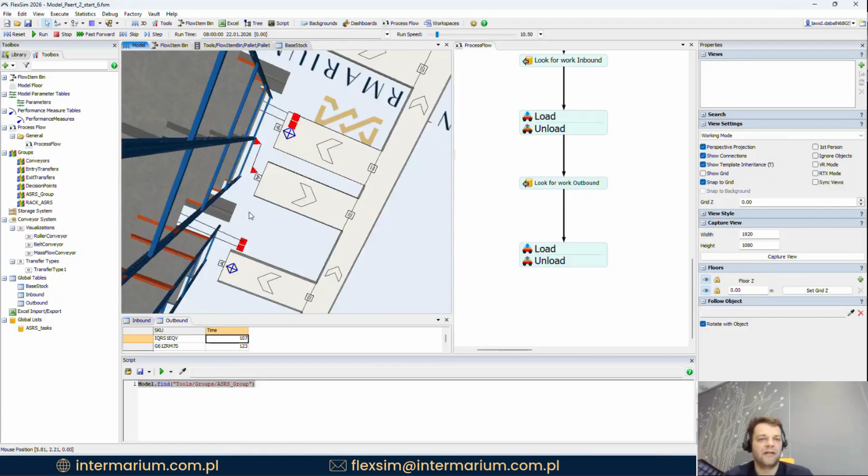So I will just do the A connection. It creates the transfer. I would delete the connection because I don't want to have those connections. I only want to have the entry transfer. You can leave it like this, or after making the connection, you can right click and you have the remove connection option. So it's up to you, whichever is better for you. So we have this connection.

Now we need to create the logic so FlexSim knows which entry transfer is mine. And what I usually do is I'm making the connection to it from the rack perspective. This is just the most common approach we're going to do here. So the S connection, connect with both racks.

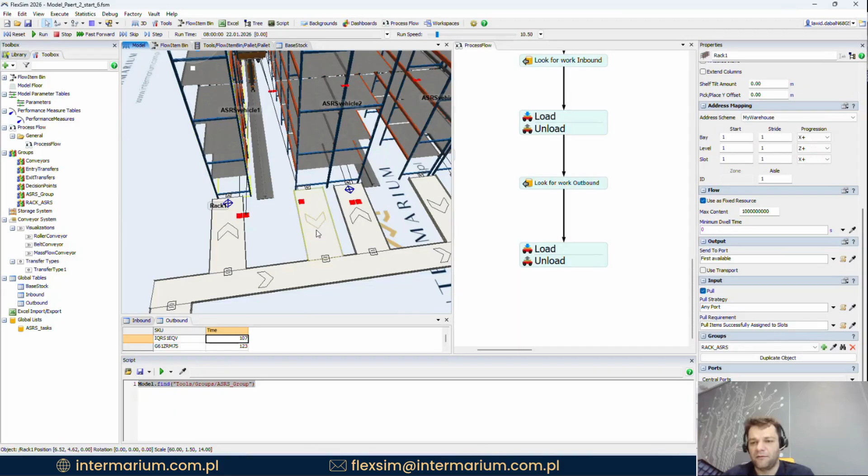So from the rack perspective, if you go to the list of center connections, ports... yeah, oh, I did it twice for this rack, so this one is okay. Yes, so on the first connection from the rack, there's entry transfer. And I will do it with every rack.

You can see those connections. You can do it with racks, you can do it also with ASRS. Okay, it's maybe one less connection, but then maybe in the future you have a different entry exit transfer for different level or different racks. It can vary. And if using this standard connection, when you copy it, it will still work, because it's also copying all the different connections. So if I have this connected in the unload, I can define the unload point from the rack perspective.

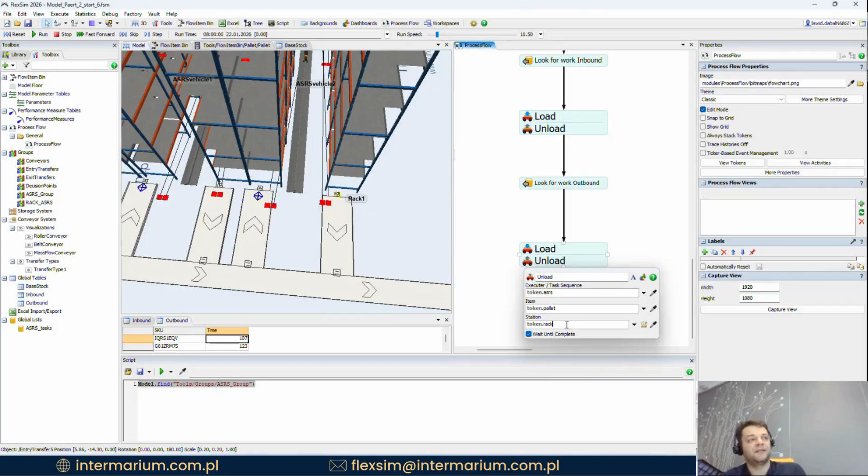Yes, from the rack perspective. Now, what is the rack here? Because I have the pallet here. I don't have the rack. The rack is, I need to define.

Before I load that I have my rack, or maybe I will just do it. I will have the entry transfer. And what is the entry transfer? An entry transfer is token.pallet.up. So pallet up is a rack because we are doing outbound movement. So when you start the outbound movement, the pallet should be still on the rack. So this is my rack.

And if I have the rack, maybe make it a little bit easier. So I have the rack, and this is the rack. And if you have the rack, then we have the entry transfer. So from the entry transfer...

I'll have token dot rack center object 3, because we have the ASRS connected and the decision point for the routing on the conveyor. We can have all of this in one line, but let's say it's easier to read if we split it. So now we know the entry transfer. Let's call this assign label entry transfer.

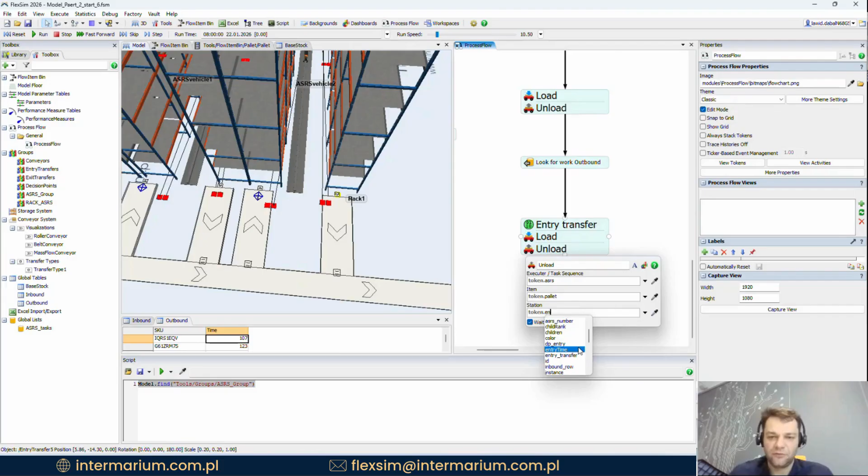Okay, I take it, this is okay, but on unload, I want to put it on the entry transfer. And now the ASRS is moving, it's there. So now usually I want to loop it back. Still not ready, we have some work to do here, but let's loop it. And in reality, this transfer should be a little bit on the side because I want to slide the pallet from the side of the conveyor so we can move it like this.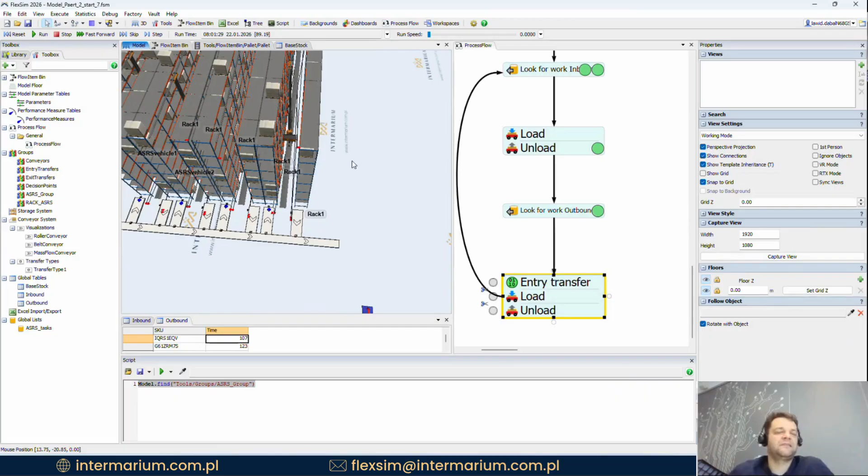Okay, so now if I run, it still won't work properly. Why? Look, with the inbound task, you make the inbound, the ASRS, but now it waits for outbound on the list. It waits there until the task somehow will be added from this alley. We don't want this. We don't want to block ASRS. We want this to be moving and checking constantly inbound and outbound tasks if there is work to do. Because I cannot guarantee that it will always be a double cycle or mixed cycle. I can't guarantee it, it depends on data. So I need to have a separate exit for when there is nothing.

So am I looking for the outbound? I want to use max wait timer. So I want to wait for outbound for a specific time. And if I don't find it, I want to move to the second destination. So I want to move it like this.

So do the inbound. Okay, you did it, now check for outbound. If there's nothing to be taken out of the rack, okay, let's check. Maybe I can do some put away and some inbound task. Maybe I can do it like this. And the same should go from this perspective as a method for inbound. But maybe if there's nothing for the inbound, maybe I can take something out of the rack. So in this case, I will also use the max wait timer, remove, set label, second destination, and then check it here.

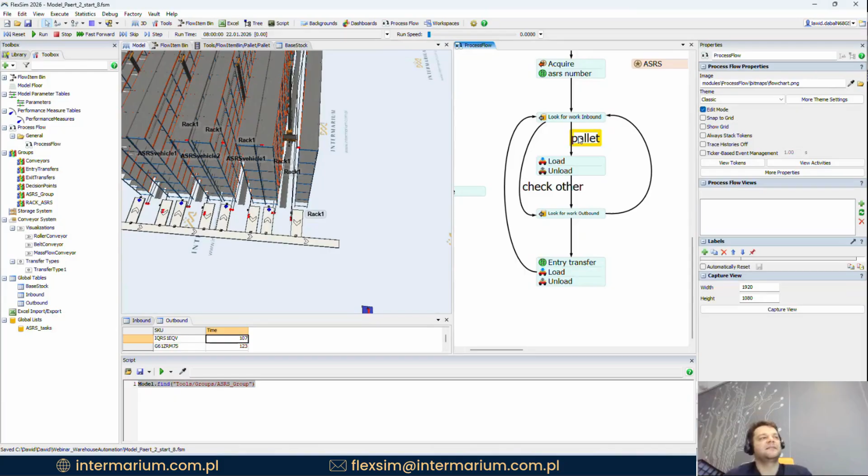If I run like this, I would have an infinite loop in FlexSim, and most likely my model will be shut off. Why? Because look how this logic works. Let's say I start with the model, I go for inbound, looking for work, 0 seconds in this case for waiting. Okay, nothing to inbound, check outbound, nothing on outbound, check inbound, check outbound, check inbound, check outbound. And I always have here time 0. So I'm circling, looping all the time with 0 seconds, so I have an infinite loop because time is not moving forward, because I'm constantly checking for work and there is no work there.

So somewhere I need to set some delay here, so this token would loop. Let's say I will put this here 5 seconds. So I will then recheck it every 5 seconds. So now I'm resetting and running, yeah, and you can see the token be filled and be moved, checking forward.

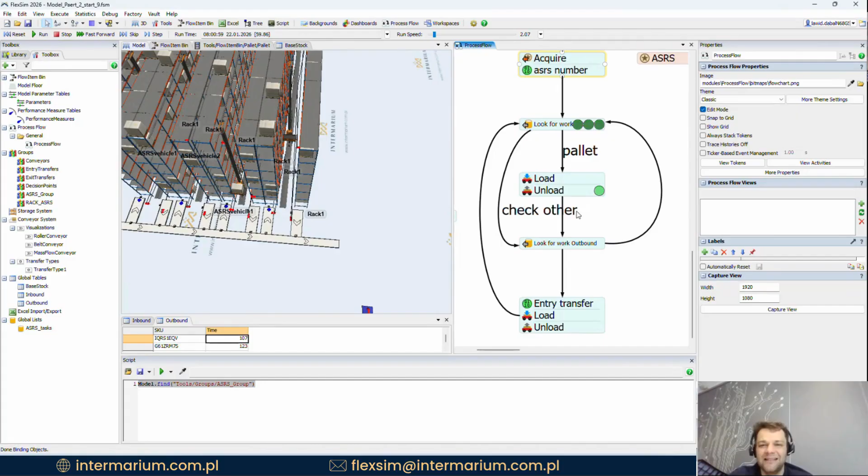Usually, it needs to be put somewhere, in this case inbound or outbound, and wherever you put it, then this task has a higher priority because the token waits for the task there. So if the task arrives, it is found first because it waits there. So whenever you put the delay, then you will have the higher priority there. In this case, for me, the inbound has higher priority than the outbound. And if I run it now, I will have the first outbound task. The ASRS is moving this.

Let's see, it puts on the rack, and it travels here. Let's check its IQRS. This is my palette, and this is what I want. So the logic works.

What we don't have here yet is this. We need to loop it because we only create the outbound task for the first palette. We need to loop it, so you create the task. Again, you need to increment. In this case, it's going to be the outbound row, incremented by 1.

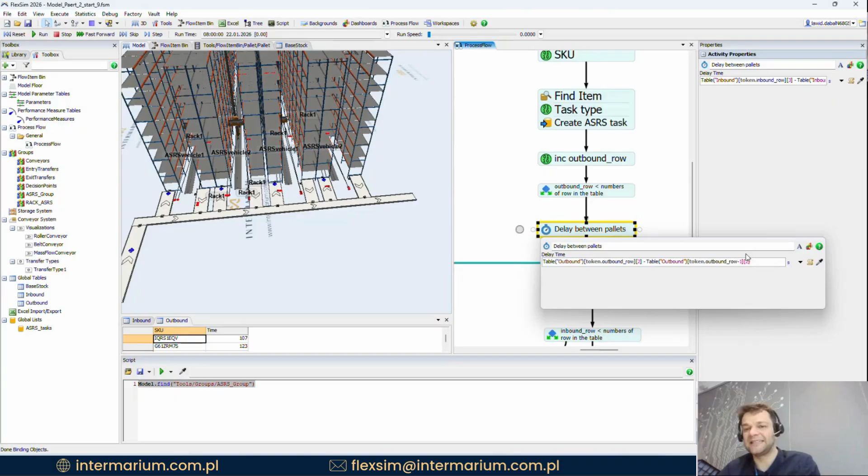Let's still check if this. So it's not inbound, in this case it's outbound. And here is also outbound. Outbound row, outbound row. Yeah, for delay between pallets, the same, we just change inbound to outbound everywhere. It's outbound here, here's outbound, and here is outbound. In this case, please remember second column because the table is structured differently. And now we have it.

And I can again loop it to the SKU, because I need to then check again which SKU I want to take out of the warehouse. And we'll have sink there. If you took everything, it's finished.

Important thing that you need to remember is that if you use the push logic, push to list, the token waits there until somebody pulls this task. So if you want the token to continue here, you should use max wait timer and keep on release. On release, the token can move here and then do the next loop.

So in this case, what we did here is we changed how we're controlling the ASRS. And now the ASRS has its own logic here. So let's say you can create the algorithm of how this should choose which task should be next, and you can prioritize it however you want.

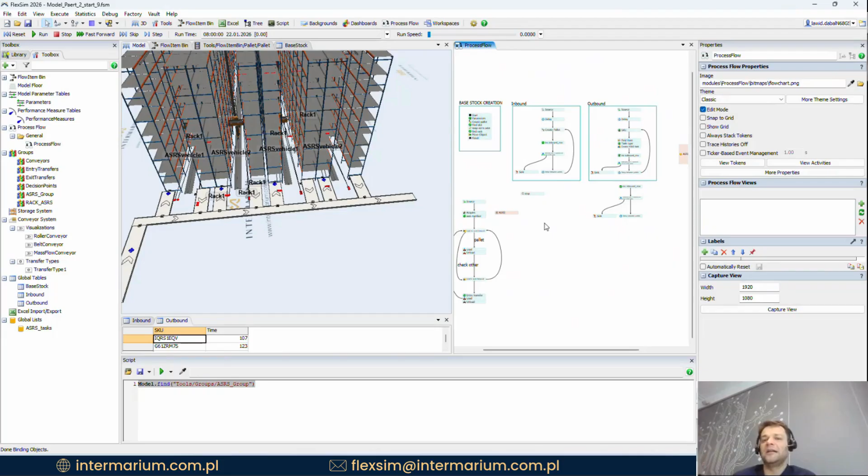For example, the more parameters you add to the list, the more options you have. Because, for example, we could add bay number or level number, and maybe sort it through the bay or level. Maybe you have the ASRS that has 2 places for pallets, it can take 2 pallets at a time. Then we do it differently. Maybe you need to do some reshuffling.

So, for example, when you do the outbound and you have a double deep pallet, maybe you need to create the extra task, and this task that you'll be reshuffling, or shuffling, moving, or whatever you want to call it, because you need to take the something that is ahead or before the pallet you need. So with this list, it gives a huge, let's say, flexibility in how you want to handle the logic if any resource needs to choose something.

So as we said before, we have created this from the perspective of the ASRS. It's much easier to understand the process like this. Again, imagine you are the ASRS. I'm making the inbound - yes, there is something to inbound. I'm making the inbound task.

Okay, I finished, what should I do next? You finish inbound, let's check. Maybe there is an outbound movement that I can do. If yes, do it. If no, check inbound again. Yeah? And this is the logic that we are doing here.

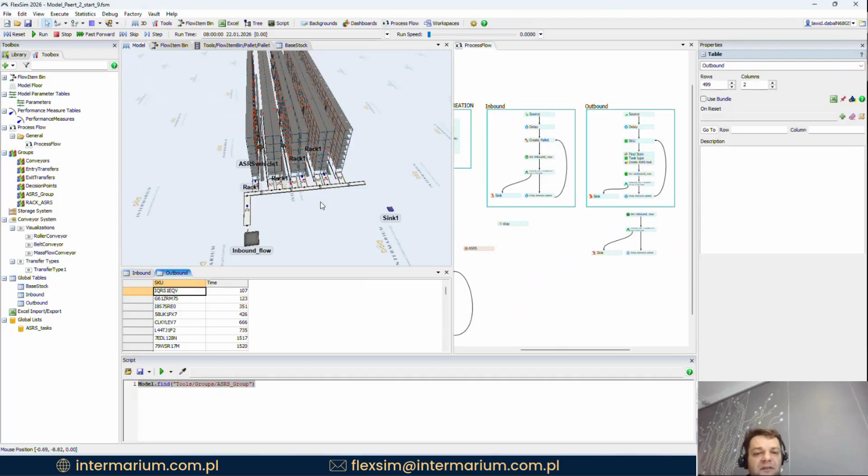And because of it, this inbound-outbound is also a very good framework if you have data with timestamps. So I have some historical data, or maybe you create some scenario creation tool in Excel. It's always easier to make scenarios in Excel, or maybe you want to do it in Copilot with something. Create a scenario, put it in FlexSim, test it, run it. Yeah, test it with timestamps. Let's see what will happen there.

So as you can see, not a lot was built in terms of objects, but in terms of logic, we did a huge step forward in how we are controlling the system. Still, this is a very universal model, so if this warehouse will be bigger, I will just copy everything.

Yeah? Of course, we need to add sink there because we need to have the exit for the outbound pallet. There. Yeah? We need to have the exit. So still it works.

And one remark here, yeah? Let's say you're creating the model on the real data, yeah, or on some data. You have inbound, outbound based. It most likely will happen that these data are not 100% correct.

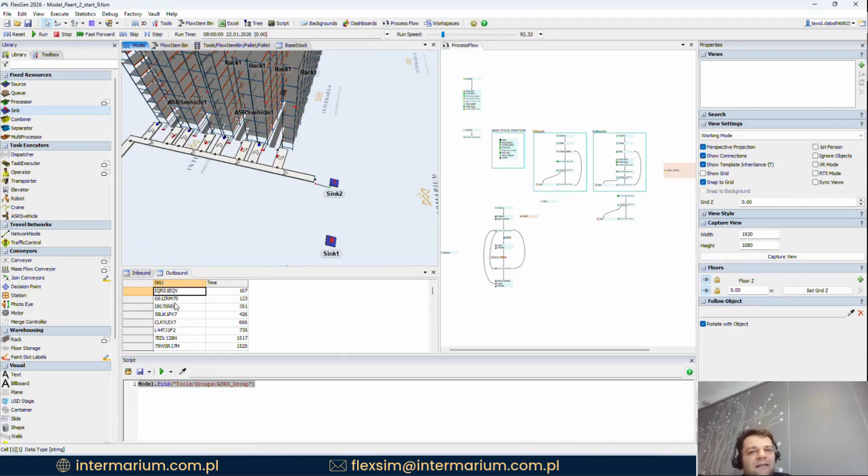So for example, in this case, it can happen that I'm creating the outbound task for a pallet, and this pallet is not in the warehouse yet. Or maybe this pallet was somehow removed from the base stock. Or maybe someone forgot to ask someone to put it there. Maybe you have mismatched dates.

Yeah, you have outbound for Monday, and you have base stock from last Friday, and somebody moved something when it was the weekend.

It can happen. If this happens, you can check it with the find item, because find item also has a max wait timer. So if you choose the max wait timer and choose, for example, to release token on the second destination, this is the logic when the pallet has been found. And then you can write the logic.

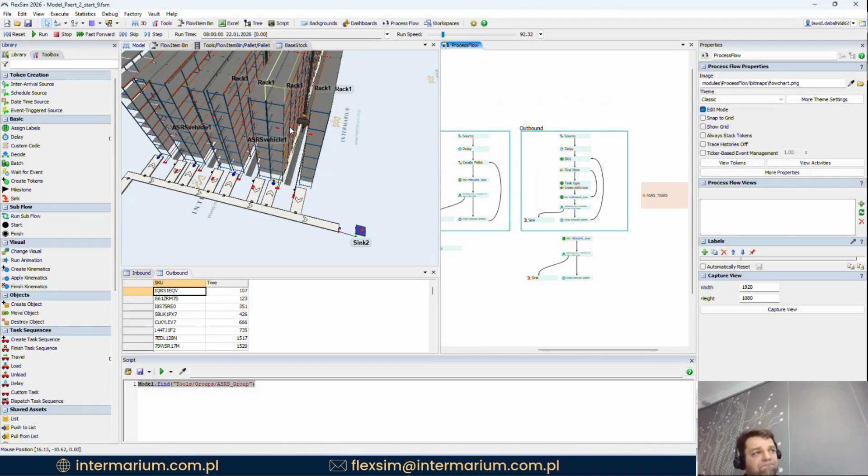How would you like to handle these exceptions? You can handle it like this: okay, nothing happens, just don't create this task, so it will skip the problem for you. Or maybe you want to create this pallet in the warehouse somehow, it just appears magically, because you want to have the correct number of moves done by the ASRS.

With this find item, you can be prepared for these mistakes. Maybe it will be there. Most likely, usually 1-2 pallets are missing because of the different timestamp or because of how WMS is working. Maybe the pallet was en route at the time the snapshot of the stock was made, it can happen. So with this, you can very easily be prepared that maybe I will have some discrepancies in the data, and maybe I can handle it like this.

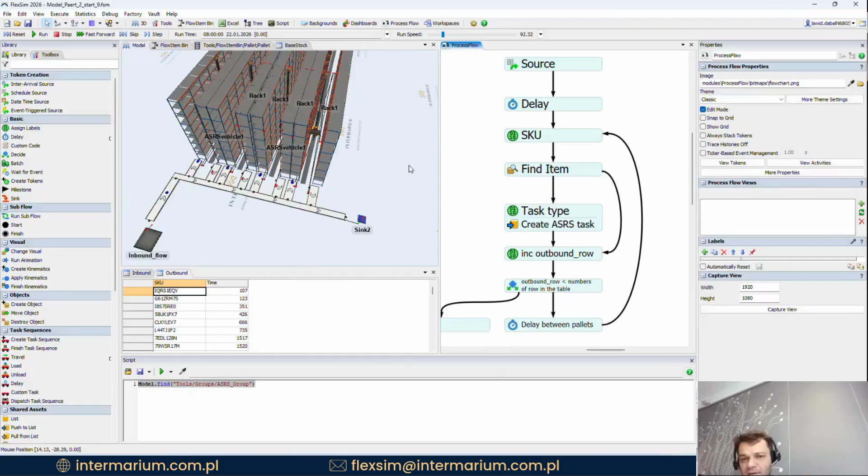Okay, I think this concludes today's part. We'll focus more on the logic of controlling different systems, creating the way algorithms work, and how we can control it.

This is just a framework. You can put much more details to it. By adding details, I mean adding more fields on the list with more parameters that you use for choosing what should I do next.

With this list, the same logic would apply for, say, the AMR or AGV. I want to look for the work, look for the closest work. With the list, you have a lot of different fields, even predefined ones, like for example distance, and then you can look for the task that is closest to me, especially if we're talking about the AMR or AGV, and I want to create a task - the one that is closest to me.

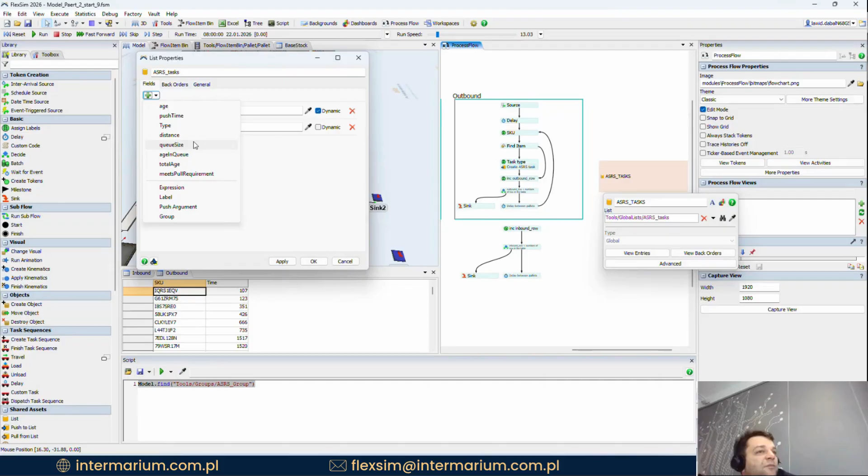Or for example the queue size. By queue size, as if you are handling different buffers or different conveyors in this case - let's say you have multi-level conveyors and the ASRS is taking the pallet from multiple levels, choose the pallet from the conveyor that has the biggest queue, so it's the most occupied one. A lot of these are pre-built, and you can really use it.

So, the list - very good tool. Whenever you know that in your logic you need to choose something from multiple elements with some parameters, with some logic, list is your friend. Especially if you want to change the logic - sometimes changing the logic is just adding a different order, or changing direction, ascending or descending, and checking. It's a very quick, easy change that you can do, and it can completely change the logic or algorithm you're doing, and it's pretty easy and quick to do.

Okay, so I think this concludes our building part for the automatic warehouse. We added a lot of logic, we're adding more and more details there.